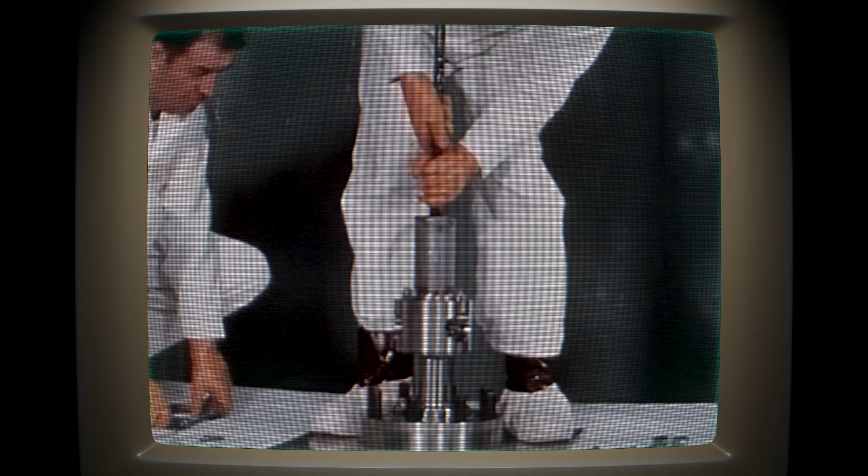Safe lies don't just explain disasters. They protect the systems that cause them. The claim is that the central control rod was lifted roughly 50 centimeters, far past its safe range, instantly driving the reactor prompt critical. On paper, that sounds decisive, a reckless behavior by the operator. But at SL-1, the difference between safe and fatal wasn't a dramatic pull. It was a narrow, uncertain band of reactivity where a few extra centimeters mattered more than force or speed. The system didn't require violence, just proximity to the wrong condition. And that is where the story starts to fray.

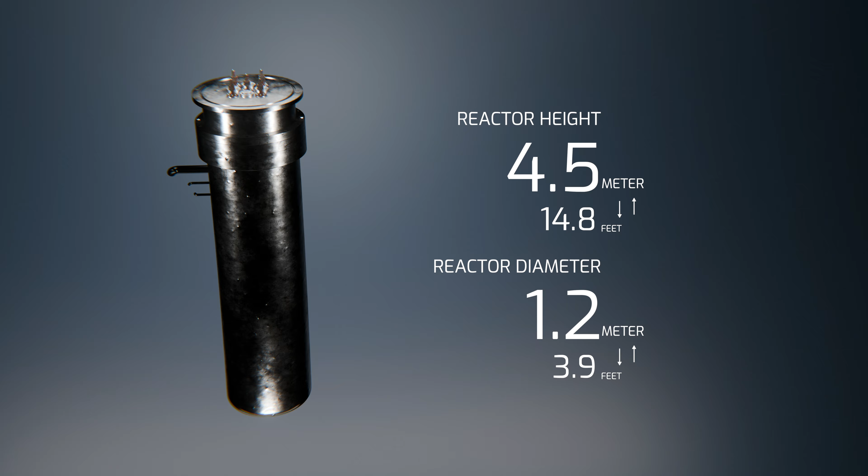SL-1 was a small experimental boiling water reactor built to supply power and heat to remote military installations. Its design philosophy favored compactness and simplicity over redundancy. Fewer systems, fewer components, less margin. The reactor itself was relatively small, about 4.5 meters tall and just over 1.2 meters in diameter, housed inside a specially built cavity roughly 5.8 meters deep.

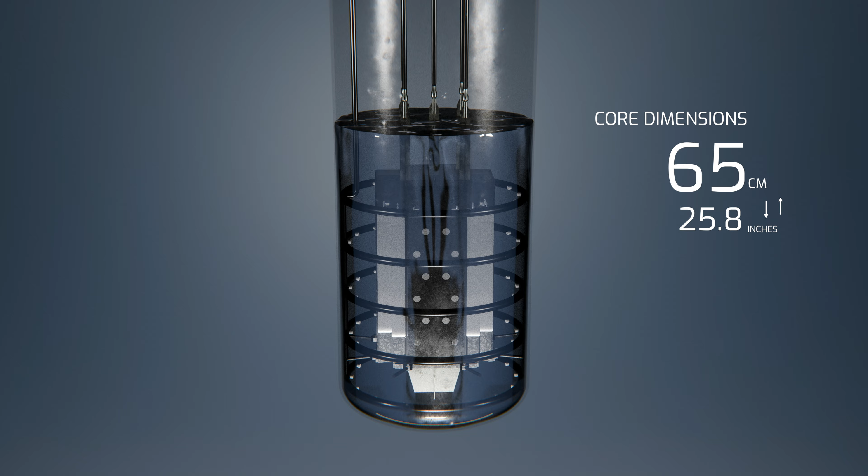Beneath the vessel sat a dry shield mixture near ground level, while the surrounding cavity was filled with gravel for additional shielding. Inside the vessel, the active core was compact, about 65 centimeters high, positioned roughly 80 centimeters above the base. The reactor was filled with water to a height of approximately 2.1 meters, serving as both coolant and neutron moderator. The core was divided into 16 segments, each holding 4 fuel elements, except for corner positions near the vessel walls. Each fuel element contained uranium-235 at roughly 91% enrichment.

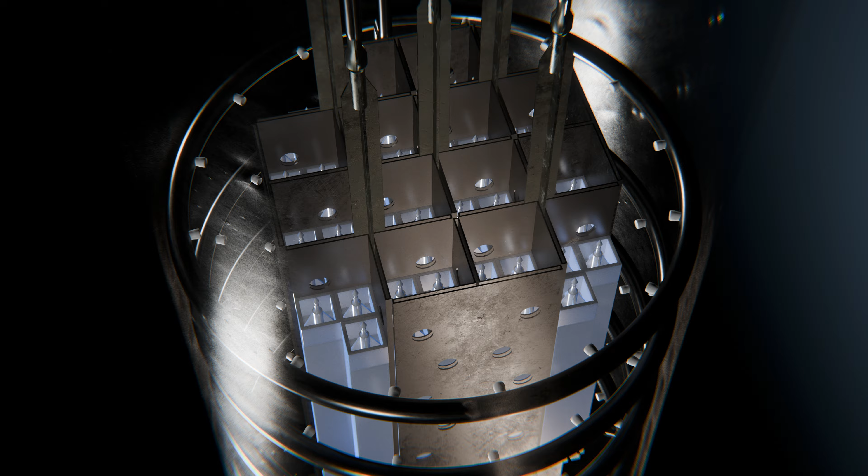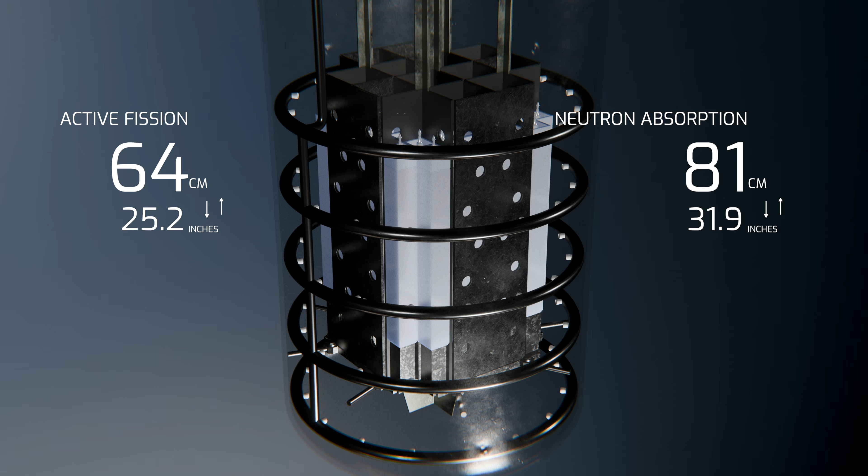Between the fuel elements ran narrow guide channels that allowed the control rods to move vertically through the core. The control rods themselves were cross-shaped, measuring roughly 36 centimeters across at its widest, with a length of about 1.3 meters and 75 centimeter length at their thinnest sections. A 2.1 meter steel bar connected the rod with the drive mechanism located at floor level. Because the fissile portion of the fuel extended only about 64 centimeters, the control rods had more than enough absorber length, 81 centimeters, to fully cover the active fuel region when properly positioned.

At its core, the reactor worked like this. Fuel rods produced heat through nuclear fission. Water flowed through the core, acting as both coolant and neutron moderator. As water absorbed heat, it boiled, producing steam that could be used for power generation. Reactivity, or the rate of fission, was controlled by control rods inserted into the core, which absorbed neutrons. Push them in, the reaction slowed. Pull them out, it accelerated. So far, everything is standard.

What made SL-1 different was how much control was concentrated. The central control rod carried a disproportionately large share of the reactor's reactivity authority. Withdraw it far enough, and the reactor could transition from delayed, controllable fission into prompt criticality, where the reaction accelerates faster than human or mechanical systems can respond. During normal operation, this was managed by procedures and discipline, but during maintenance, it became dangerous.

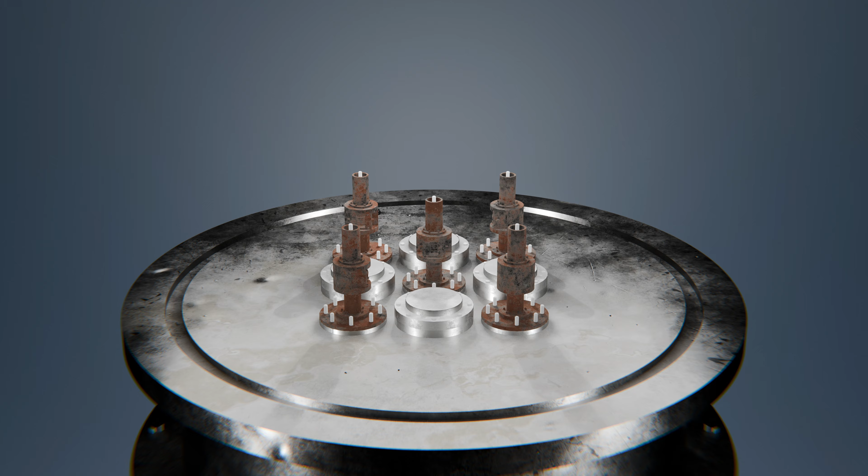To reconnect the control rods after shutdown, operators had to manually lift each rod about 10 centimeters to reattach it to its drive mechanism. This required opening the reactor vessel head and physically handling the rod from above. There were no physical stops limiting upward motion, no interlocks preventing excessive withdrawal, no automatic shutdown systems active during this step. The reactor was considered safe, so long as the rod was only lifted a few centimeters.

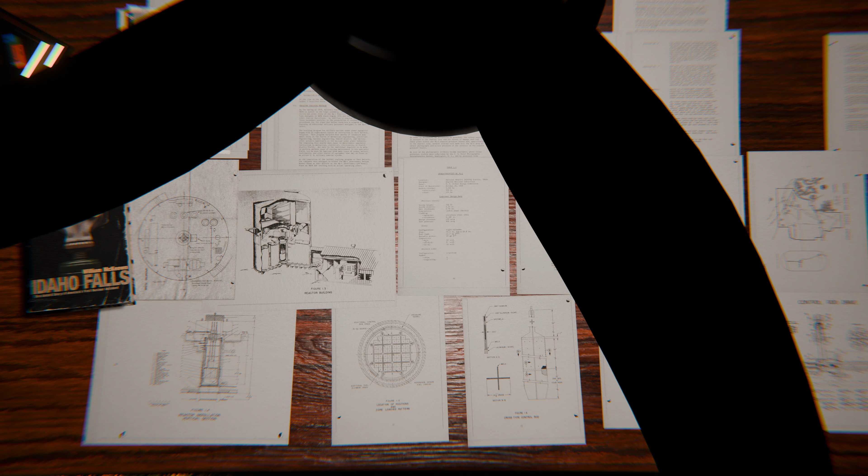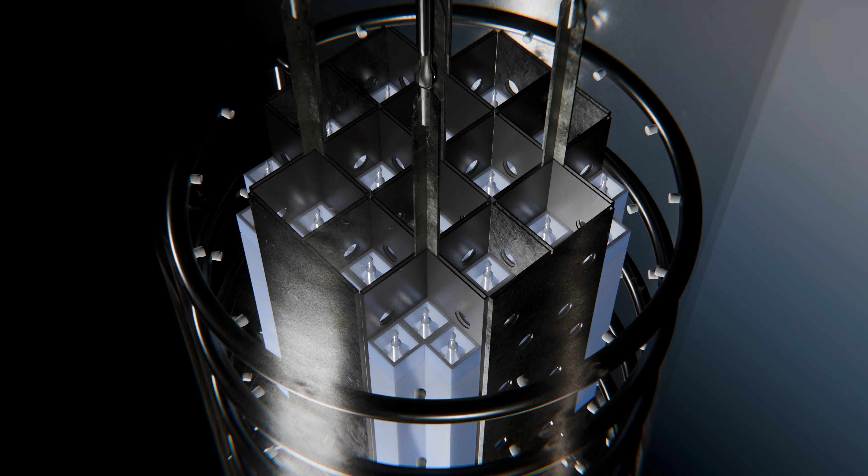From understanding this design, one thing becomes quite evident. The reactor was planned for this. Perhaps a military self-destruct requirement to hide its technology if things went south during the Cold War, or they wanted a nuclear reactor so simple that safety barriers were just completely ignored. They got both. The worst part is that a human could initiate the process physically or mechanically with moderate effort.

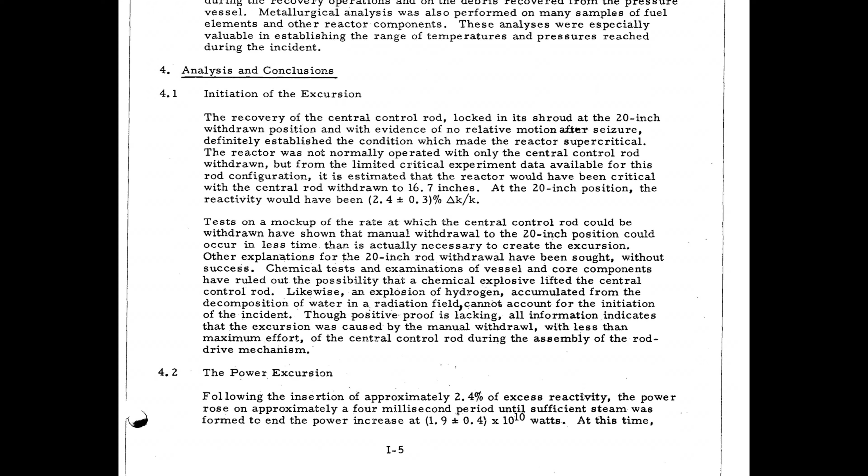Either way, this only answers the question of why it was allowed to be operated in such manner. The problem now is, how far would you have to pull the rod for the system to go prompt critical? The report concluded that the only way would be if the central rod was lifted about 50 centimeters. That number was inferred from the criticality chart of the reactor. Conveniently, the rod was also found stuck at that position.

Once written down, the number did what numbers always do. It solidified. It implied a distance that had to be traveled deliberately. By attaching the incident to a number, it cleverly reframed the accident of a system that tolerated razor-thin margins into a story about someone going far past them. The rod was lifted for sure, but how or why it was lifted remains a mystery. Or does it?

During the investigation, one recurring problem was quickly dismissed: friction and binding of the control rods. During maintenance, the rods were handled manually, guided through tight channels only 5 millimeters wide, where even minor misalignment could create resistance or momentary binding. The rod itself was 1.3 meters long and traveled fully inside the channel.

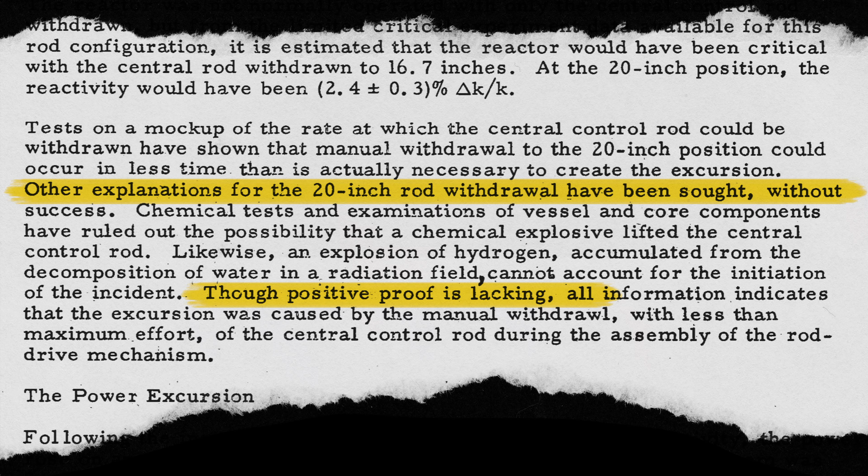Operators and engineers had long treated uneven rod motion as a mechanical inconvenience. Familiar, manageable, not a safety concern. Because, at the end of the day, the rods usually behaved well enough, so friction was never elevated past the causal factor. The assumption remained that trained operators could compensate for mechanical imprecision, and conveniently, the investigation found no proof that friction alone caused the accident, and moved on.

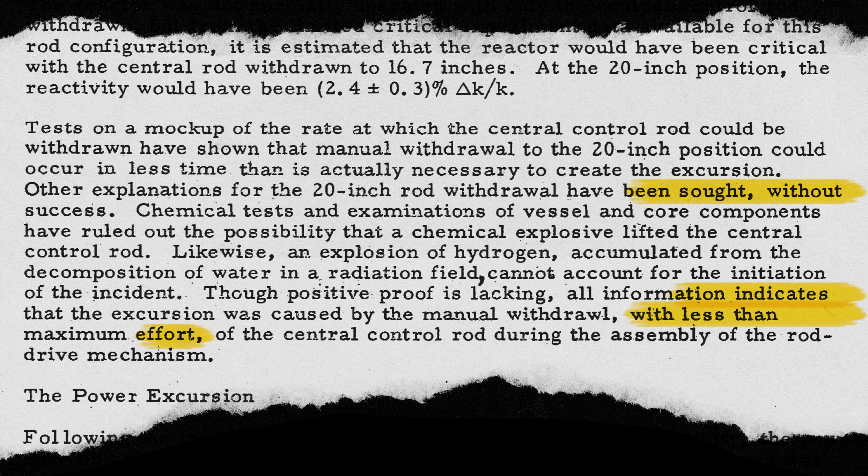What was dismissed was not the possibility of binding itself, but its importance. And that distinction matters because taking binding seriously changes the entire tone of the event, something that the report, being long and detailed, hides reactor-level problems in plain sight by just acknowledging them instead of addressing how they interacted.

For instance, the central control rod alone had a reactivity worth of 17%. Think of it like a volume dial that goes from 0 to 17. Disaster begins at just 0.6. The concentrated power on the central control rod is roughly 20 times more than what is needed to trigger an uncontrollable power spike. And that's not all.

By the time of the accident, the reactor had already burned through 40% of its lifetime. As fuel burns, the core becomes weaker and uneven. The lower portions of the fuel stack, where power is highest early in life, degrade first. To compensate, the control rods must be positioned higher in the core just to maintain operation.

Over time, this increases the power imbalance between lower burn fuel and fresher fuel above it. In that state, less rod movement at a single point is required to produce a rapid power surge, because the rod is already sitting in the most reactive region.

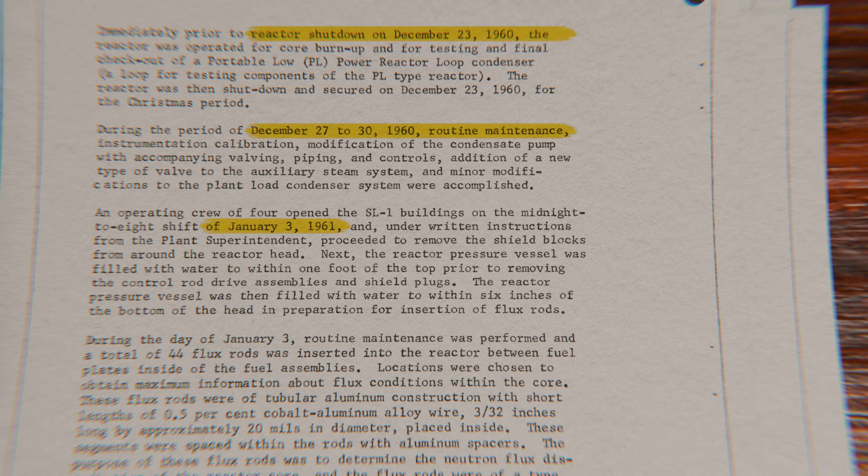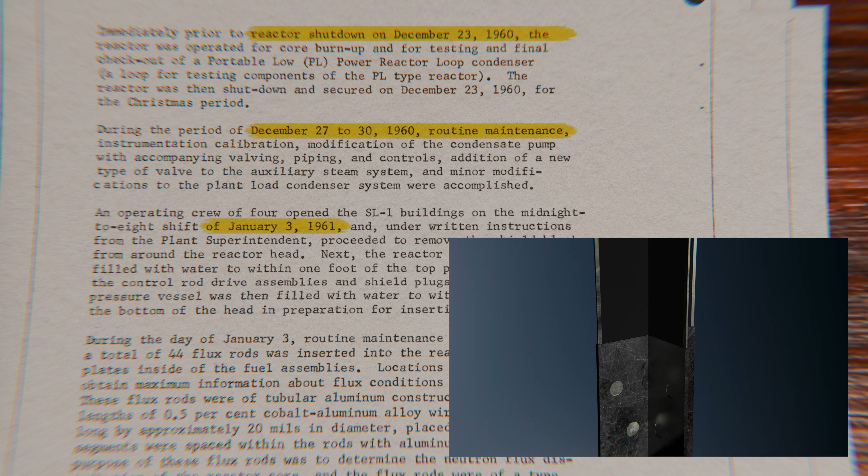Finally, the reactor had been shut down for 11 days. During the reconnection process, the central rod had to be moved manually. It is plausible that the rod encountered resistance enough to require extra force. The assembly weighed roughly 38 kilograms, traveled through tight guide channels, and displaced water as it moved. This was not a component that could be accelerated smoothly or casually.

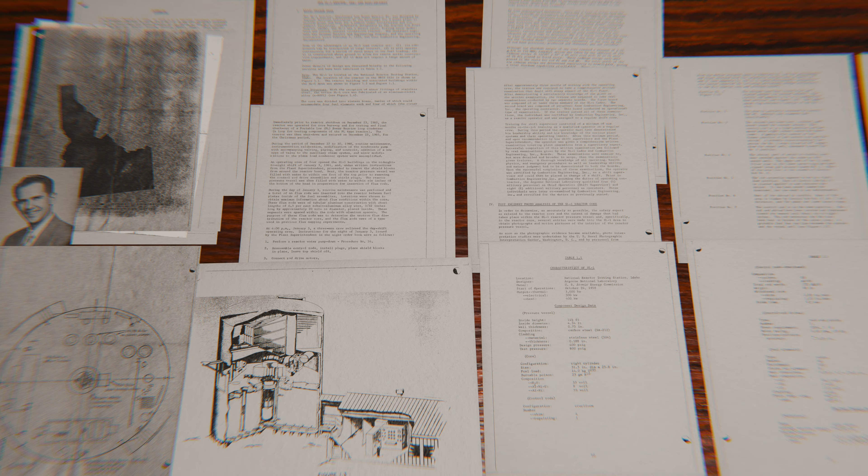These three pieces of information are scattered around the first pages of the report. On their own, they seem like technical detail, but together they are conclusive. Only a narrow set of possibilities can explain the accident, all of them consistent with small unintended motion having large consequences.

First, the operator attempted to free a stuck rod, applied additional force, and the rod unexpectedly traveled the full distance required for prompt criticality. But naturally, to loosen a stuck rod, the most likely way operators would grab the handle would be with both arms pointing downwards. This configuration makes it unlikely for the rod to travel 50 centimeters, though possible. Hands pointing up makes that likely, but an experienced operator would consider the danger of handling a stuck rod in such manner.

Second, the rod was sufficiently stuck that a second operator assisted, briefly doubling the applied force. In that case, a sudden release could plausibly produce a larger than intended motion, which would also explain the outcome of the second operator. Both scenarios suggest operator's fault. However, as we've seen here, the machine was extremely overpowered and difficult to work with. Considering this, it leads us to a third, speculative but more troubling scenario.

In this case, the rod is really stuck after 11 days without moving. The operator pulls the rod. It moves, but it gets stuck again, just a few centimeters above the threshold to initiate minor fission. Because the lower portions of the fuel have already been burned through, the operator thinks it's not a big deal to force it further. Heat is generated, just enough for water to flash into vapor around the fuel and guide structures. That vapor reduces resistance inside the channel at the worst possible moment.

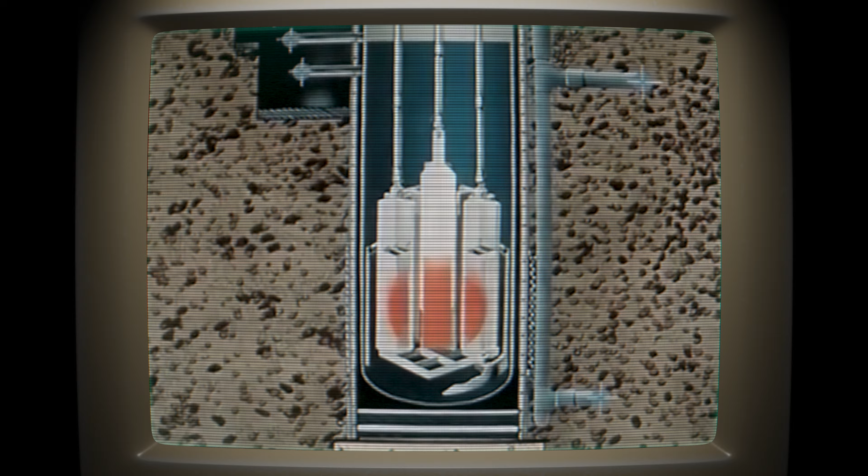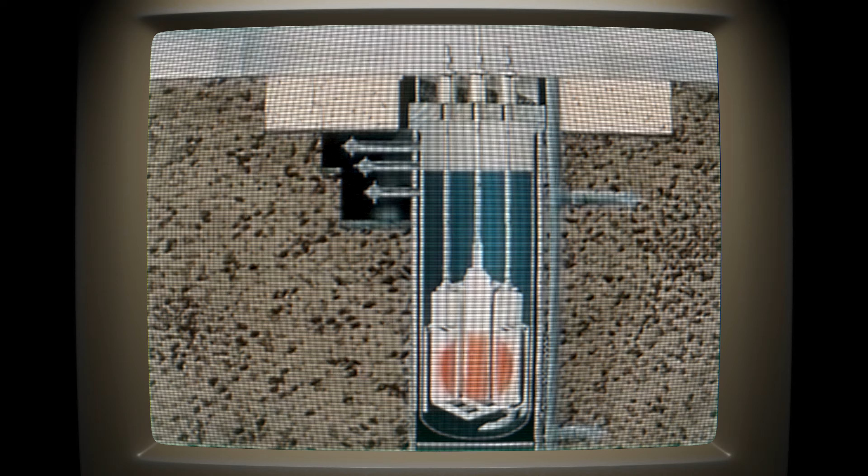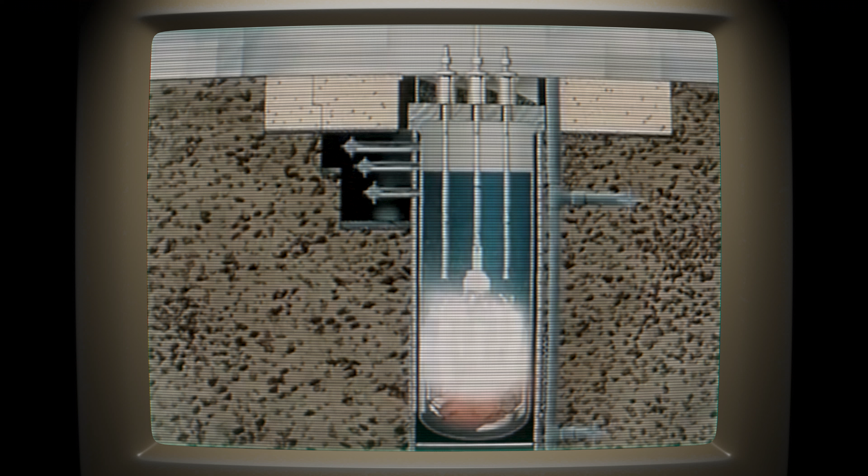This possibility was quickly discarded for a simple reason. If true, it would mean the system was unstable and that normal manual handling could lead directly to runaway physics. It was known that the program for small military reactors depended entirely on the accomplishment of SL-1, and that conclusion was unacceptable.

Once the physics had been reconstructed and the rod position settled, the investigation faced an uncomfortable question. Why would a trained operator, during a routine maintenance procedure, lift the central control rod far enough to destroy the reactor? This is uncomfortable for mainly two reasons.

Training to handle the reactor took over 9 months to accomplish, where multiple tests were taken, along with various board evaluations. If the operator that supposedly pulled the rod was a good employee with no previous emotional problems or anything that would lead to this action, then their explanation has a major, unfillable gap, leading back to machine design problems.

Second, if the operator had emotional issues or other complications, it meant that all 9 months of preparation, tests, and board assessments failed. They allowed an unstable individual to work with an incredibly dangerous machine. Regardless of individual motive, the program would never survive. But curiosity as to why an operator would pull the rod would, and they knew they could use that.

An affair gossip, where the operator who lifted the rod had an intimate relationship with his co-worker's wife, emerged years later to justify murder-suicide. William McKeown, in his book Idaho Falls: The Untold Story of America's First Nuclear Accident, investigated the love triangle rumors. There was indeed a problem with Byrnes being threatened with divorce by his wife, and also that he was hot-tempered. However, this information was disclosed in an attempt to negate the stuck rod theory. After all, the conflict of interest was extreme.

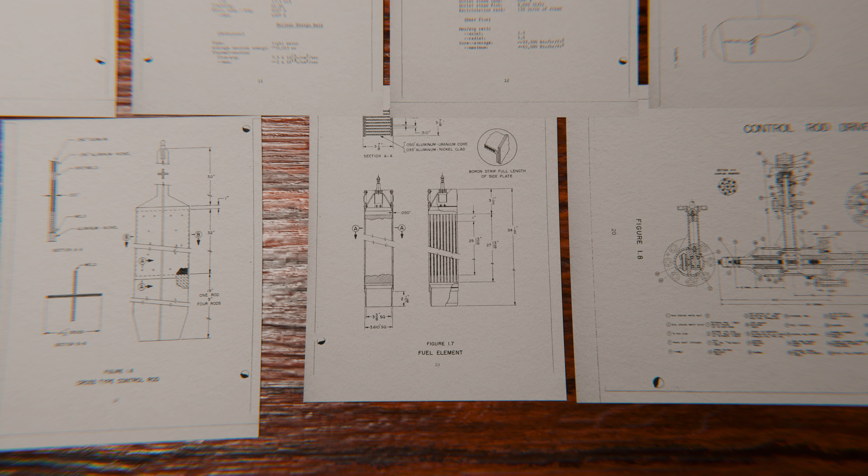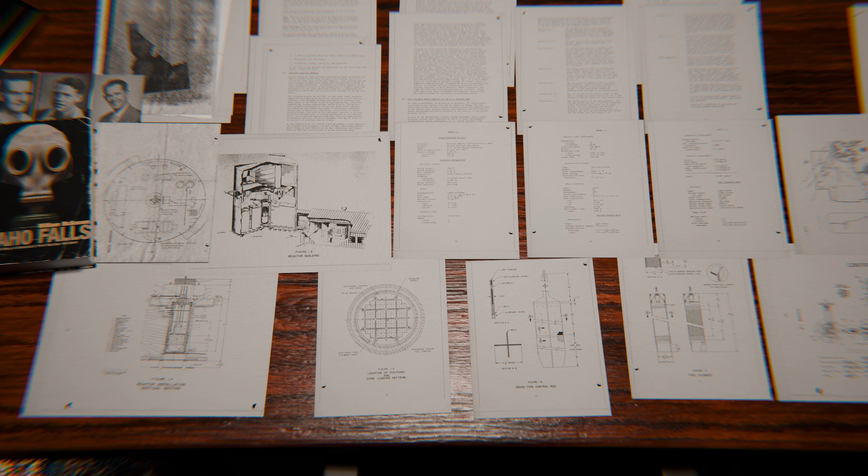Engineering logs showed the control rods had stuck or failed to drop properly over 80 times in the months leading up to the blast. So the AEC had to downplay this highly likely mechanical scenario in favor of the more sensational personal story to protect the nuclear industry's reputation, hence why an incredibly long and detailed report was created. It shows commitment, credibility, and expertise. More importantly, the level of detail makes one think that they can't be wrong or lying.

The final report on SL-1 is often praised for its technical clarity, and rightly so. But what it did even more effectively was something quieter. It shifted the story. By grounding the accident in a reconstructed rod position, the focus moved away from design and toward action. The reactor became a passive victim of misuse rather than an active participant in its own destruction. A system that tolerated razor-thin margins was reframed as a system betrayed by a single deviation.

The report, while making all information available, cleverly masked known reactor problems as details, only to lead you away from questioning the information, transforming engineering uncertainty into numerical conviction. And once that happened, responsibility had somewhere safe to land. No other position would cause the accident, so the operator had to lift the rod that far. At the end of the day, SL-1 didn't fail because someone broke the rules. It failed because the system was designed to depend on humans never crossing a boundary it refused to mark, measure, or protect.